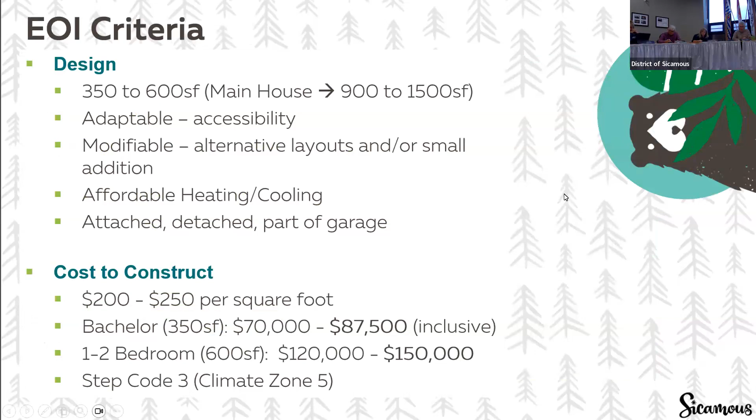New business. First up, project kickoff with McDiarmid Design + Build, expression of interest number 20-147. RA and Ross, you're in the room, are you ready to go?

Yeah. Okay, if you can step up to that mic. Do I have to talk into this thing? If you can, if you're not too tall. As long as you're loud. Is there people online?

We were selected to do the plans for the Town of the district of Sicamous, to provide some secondary suite plans for sale to people. We'd like to design small to medium sized, modest homes using honest, durable materials.

Today we're presenting seven different floor plans, just concepts. They look a little more fleshed out because I designed them in AutoCAD, so it looks a bit more official, but it's still concept.

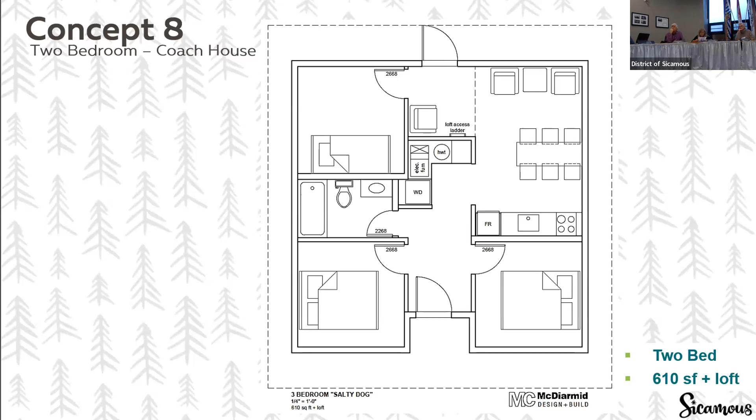My one question is on all of the plans, as far as closet space goes, since we all know storage is key. If we needed to squeeze a closet in, this one here is tight, other than that single bedroom. This one has two queen size beds and bedrooms with a wardrobe system, three boxes in each room. This one's tight again - that one bedroom is more of a guest bedroom or office, flex space I guess.

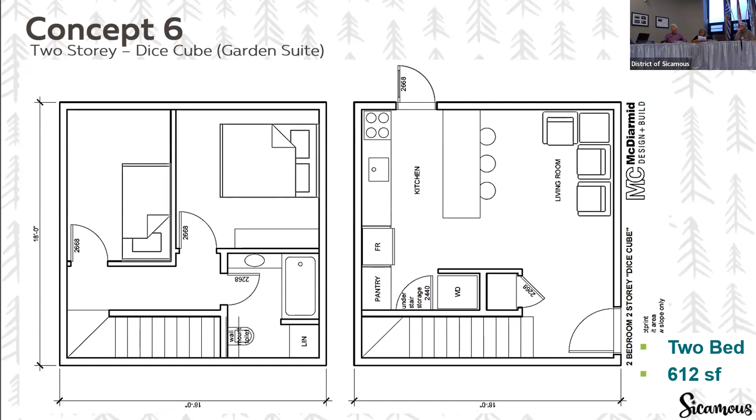You can fit a wardrobe into that bedroom too. This one's got a lot more storage.

It reminds me of European housing. I was just there in September, and bedrooms are small, but it's like the IKEA model, right? You bring it in, it's built in, like a closet. When you're dealing with such small square footage, most anyone who's going to live in 400 or 500 square feet, maybe they've come from living in a van and they're pretty good at it. It's true, an upgrade from that.

Through the chair - question, Siobhan. What's on the outside? We're all panicking about fires.

As we mentioned, you either do plaster or corrugated metal, and then you can pick your accent, which is typically like a recessed entry with wood or something like that. That would be up to the client, whether they want to fully fireproof or maybe make things more interesting by adding a bit of wood. But generally it's metal roof, plaster or metal siding.

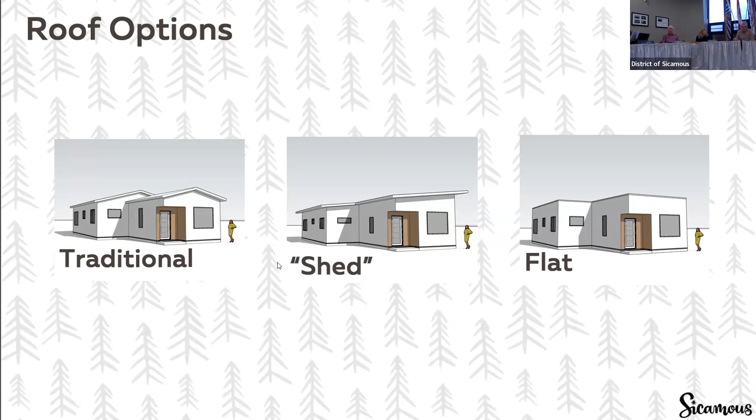Okay, so under 4B now, we have project kickoff housing projects, expression of interest number 20-147. And Mike, are you ready to go?

Yes, yeah. Would you like me to share my screen or? Sure, that would be great. Oh, it says I cannot share screen while other participant is sharing. Just a second, try sharing now.

Is that working? Yeah, yep. And are you okay, do you want us, would you prefer that we ask you questions throughout the presentation or do you want us to wait? Absolutely, yeah. So I have set this up in a little bit different format. And then really this is just to lead the discussion so that I could get an idea about what kind of concepts you're looking for, what you want to produce, how many.

So I've made just kind of an agenda that sets out a project objective, make sure we're on the same page. And I would like to go through some existing conditions of the R1 zone, just because I'm not from Sicamous. Most of this has already been answered, actually, a lot of it has been discussed a little bit, but I would like to just make sure that I'm on the right page when I go forward to do the concept designs. And then go through some of the building types, design guidelines, scope out the project, and propose a sequence. So really, this is meant just to lead the discussion, as much information as you can provide me, that would be ideal.

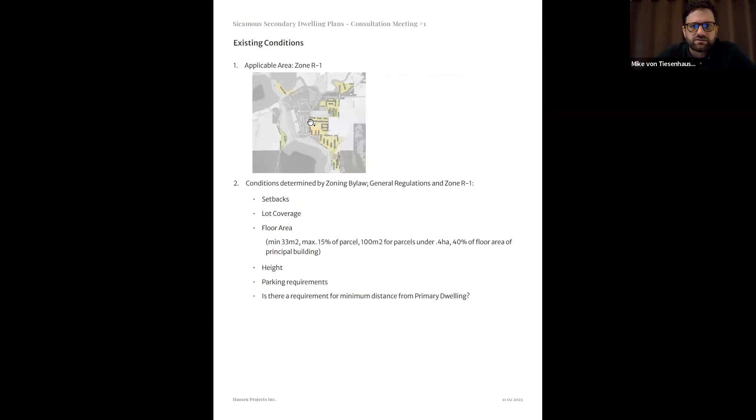Through the chair, for the 200-year floodplain, it's got a lot of fingers that move through there. I have access to other mapping that shows depth of water and gives a better idea of what the finished grade is now. That 200-year floodplain was mapped back in the 70s, 80s, 90s, and a lot of development has occurred since then and fill has been placed. So it's mostly south of Capel where the lots are significantly impacted in terms of perhaps needing to structurally elevate significantly. But talking with a local builder who came in to answer questions for the committee, it didn't sound like it would be that much - maybe 1 to maximum 3 steps up to the sill plate to access the building.

So is it safe to assume, to have a really versatile plan, that I should just assume they'll all be crawl spaces with 3 steps up, or?

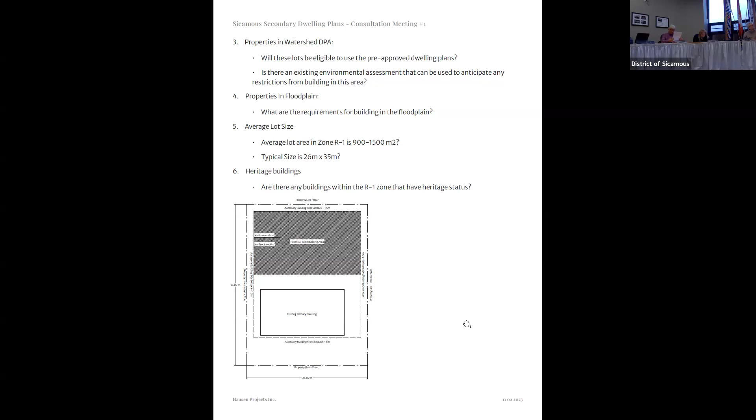So I've drawn up hopefully a site plan that identifies, I think, most of these types of buildings would be located in the rear yard. Is there any allowance for secondary dwellings in the front yards, or permission to do that in Sicamous? So currently our official community plan has a policy statement that doesn't support that, but our zoning bylaw doesn't regulate that. As long as you're meeting the setbacks - the 6 meter front setback and the 1.5 on the side - there isn't anything stopping someone from doing that.

Gotcha, okay. So this is probably the typical scenario, that there will be a driveway that goes past the house into a rear yard where the building will be. So you can see the minimum area - this is a typical lot with the setbacks identified here, and then this is the 33 square meter area, and this is a 56 square meter area just in a square. So it gives you an idea of the siting, how much of the rear yard it would typically take up.

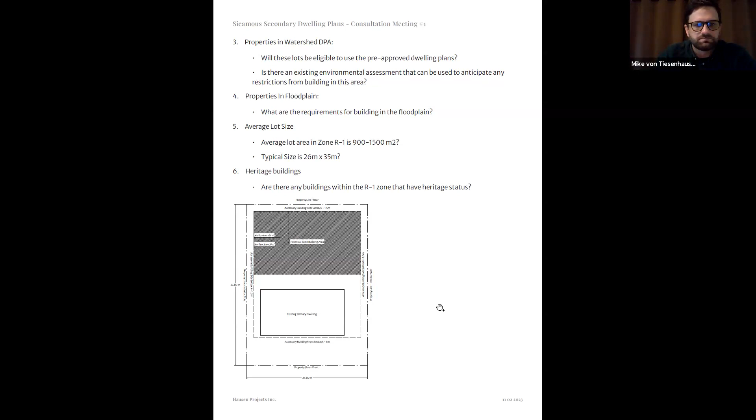So we've identified 3 different building types: a garden suite, which would be a single story, or with the height restriction, could be 1.5 stories, or a flat roof. It could be 2-story, 1 or 2 bedroom, and that would be governed by the regulations of an accessory building. Same with the carriage house - or I guess carriage house is the same thing as a coach house. I believe that's what is in your bylaw.

I've always thought of it as a suite above a garage, but it could be beside in your case. That's correct, our bylaw does allow for that, and that's to help with our accessibility goals. So the garage could be beside to make a space that someone could access more easily.

And also the regulations - it's regulated as an accessory building. The secondary suite is connected to the primary dwelling either through roof or foundation structure. That's correct. And the setbacks, I guess, are a little different for that because it's the primary part of the primary dwelling. That's correct.

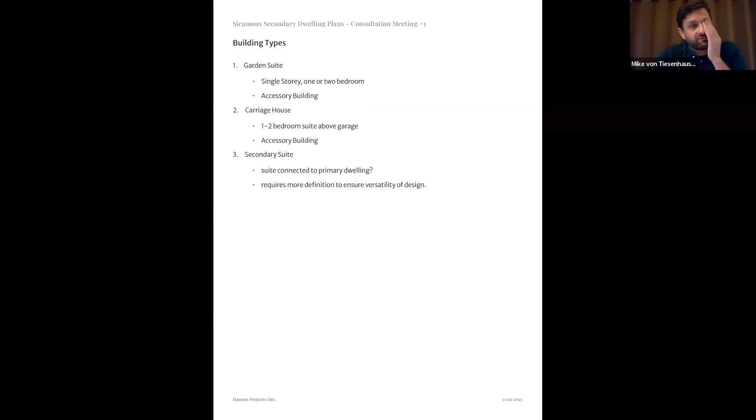So for the design of a secondary suite, it seems to me there's a lot of probably restrictions based on the floor areas of the existing building and that sort of thing. So to develop a plan that would work for numerous buildings could be a little bit tricky. So I'm wondering how many concepts do you want to see around that? Is it really just to suit one type of house that has this split level type of house? Or I think we're looking at, in general, most of the houses are around 1,200 square feet, and obviously there are going to be outliers where they might be more like 1,500 to 1,800.

Which is sort of why in the EOI we looked at asking for plans that could potentially accommodate additions to them in the future. So that would be optional - so say somebody does have a bigger house and they could have a bigger secondary suite, they could build that addition outright as part of the plan in the first place.

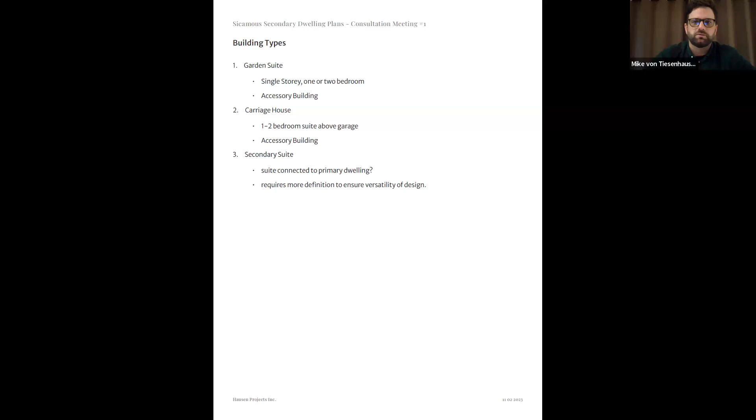So I guess this is more a question about the process of somebody buying a plan for a secondary suite and having it kind of be pre-approved. Is this plan more than just a kind of a scheme? For example, if you have a house that's like 20 feet wide, and the idea is to add on to the side of it to have a secondary suite, should that plan be versatile enough? And what would the process be for approving this to fit a house that's also 24 feet wide?

Does that make sense? Through the chair, it does, and I think we do have a few existing examples in the community right now where the house runs across the lot, and then the suite is attached by a carport, and it runs down the side of the lot, so it's longer than the house is wide. And it looks great, the carport tends to be smaller just because the houses do take up a lot of space across the front.

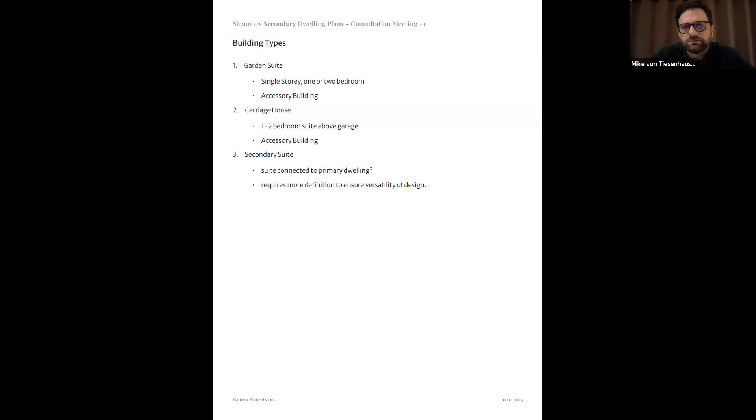It's just not like a double carport, it's a single car carport. Gotcha. So kind of the idea is there's a breezeway or a carport or something that takes up that difference so that it could fit a house that's 20 feet wide or 24 feet wide, et cetera. Right, so the carport would be that interface between two buildings that are not the same size, width or depth, I guess. Gotcha, yeah, perfect.

Well, through the chair, actually my house is like that. And Brenda, you were just looking at it. We were talking about how you could build a garage out where the carport is, make part of that carport the house and build back. Yeah, the setback, the driveway setback to the garage would have to be accommodated, but so it's a different way to look at it. It's like we have to spin it.

Instead of... yeah. And that one on Pine was like that, right? Where it's almost like a two-story secondary suite that's attached to the back of the garage. So the garage is an attached garage and the suite is partially over the garage and behind the garage. Mhm, and there's several homes like that, yeah.

Okay, so I can send you pictures of some of these if you want, Mike, if that kind of helps you. Yeah, that would be great, actually. Though the carriage house and the garden suite, those are easy to visualize. It's the secondary suite that I was kind of wondering how that works.

Although that makes a lot of sense if there is this sort of element of the building that connects it, that's not connected to the foundation or to the circulation or the use really of the other building, of the primary dwelling. Correct, yeah, like access doesn't necessarily need to be to the principal building. It could have its own separate access, down the side yard. Totally, yeah.

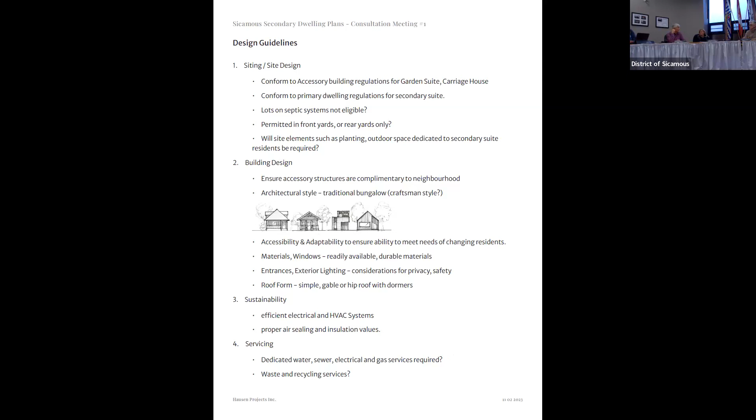Makes sense. That's great, so the next part is scoping out the projects - how many concept designs do you want to see? I'll do floor plans and exterior elevations for as many garden suites, coach houses, or secondary suites as needed. I just need to know how many you want to see, and what level - like one bedroom, two bedroom, etc.

Through the chair, these would be concepts used for public consultation. So what I've been discussing with both proponents is providing concepts, since the committee wanted to do some public engagement first, and in the end a total of 6 sets of construction plans were what the district wanted to buy from each proponent. So at this point, do you know how many of each type of plan you'd ultimately plan on purchasing from each proponent, or would you want to leave that to public consultation to decide which and what type?

Through the chair, yeah, I think the public needs to lead it because we can think what we think we know, but that may not be what people want, right? So I think that's why we're having public consultation, to get that feel - in terms of how many bedrooms, and should they be above a garage, beside a garage, attached, or a garden suite.

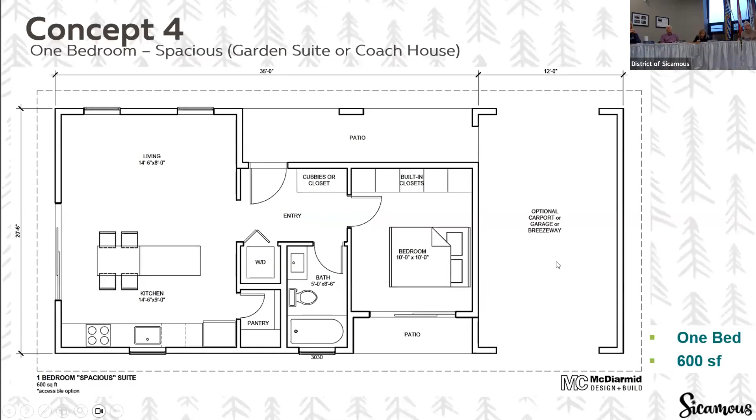Okay, under new business 4C, we have additional building plans 2024. Through the chair, so last meeting there was some discussion about upcoming deliberations of the select finance committee around budget planning for next year. That's going to be happening soon.

So I did have a conversation, and she suggested the best way forward was to consider making a recommendation to council about hosting another EOI for 2024. It would then be the trigger for that budget conversation in those meetings. So get that resolution before council first, that recommendation for a resolution, and then from there we go to that finance committee and start collecting information about how much should be set aside for that budget.

So yeah, go up, two more slides please. Sorry folks, I think our batteries might be dying. Okay, I replaced the battery but it's still not working. Up another one. No, we're done. Wrong direction. Oh yeah, Janae, to Janae.

Yeah, if the committee wants to move that recommendation, okay. So do you want me to read it first? Sure, okay, so I'll read the recommendation.